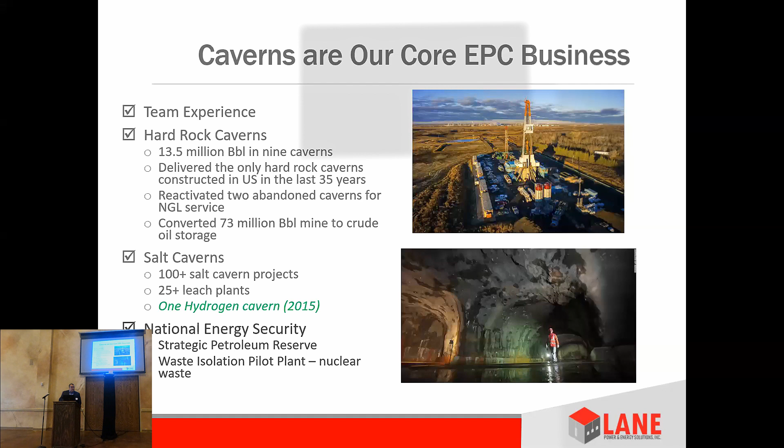On our national energy security work, my partner, who's a little bit older than I am, we call him the godfather of caverns, Tim Reichwein. He started his career out designing and building the Strategic Petroleum Reserve, and we've been doing work with them ever since. Most recently, our national security work is related to the Waste Isolation Pilot Plant out in Carlsbad, New Mexico. That's the only deep geologic nuclear waste repository in the United States. So we're doing consulting work on there for storing that, and that's in a hard rock mine down 2,000 feet into a bedded salt formation.

So, storage cavern overview: products that are stored. Primarily, caverns are used to replace spheres, above ground pressurized vessels for storage. So NGLs, ethane, propane, butane, LPGs, crude, light oil like you have in the Strategic Petroleum Reserve, petroleum products, not much here in the United States, but over in Europe, that's a big thing. They do a lot of their strategic storage for their equivalent to their Strategic Petroleum Reserves with actual product instead of crude, and they use caverns for that.

Compressed air, we've done hydrogen, as we said. We've done ammonia caverns, which we're going to talk about a little bit later, which is part of the green mix, whether used as a fuel source or as a dense carrier for hydrogen. We've done one of the only ammonia caverns in existence. And then something that's also gaining a lot of interest recently is helium as well.

Solution mine salt caverns - in the top graphic on the right-hand side, that's what a domal salt formation looks like. Those yellow caverns outlined there are about 300 feet in diameter and can be anywhere from 1,500 to 3,000 feet tall. You can fit the Empire State Building in that.

That's the size of those in the Gulf Coast. Up here in the Northeast, we've got bedded salt formations, and I'll get into that - we're a little limited on the sizes. The Gulf Coast, there's really no limit to how big you can make these. They've been a 60-plus operational year history. There's 2,000-plus caverns worldwide - we've lost count. Let's say there's several in H2 service.

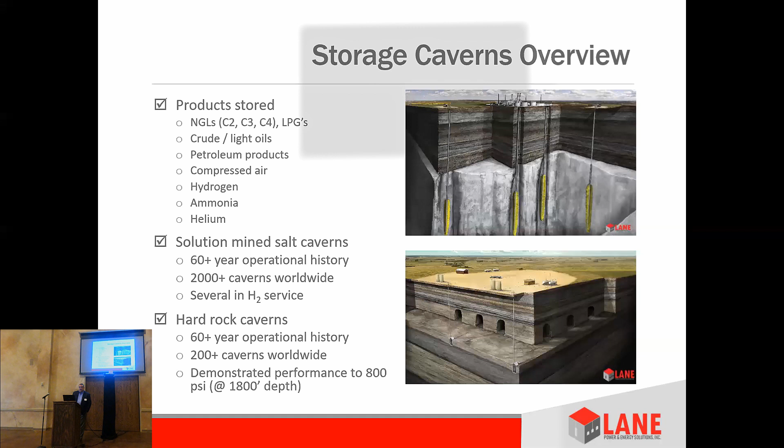So that becomes important when we start talking about hydrogen, helium, and other kinds of pressurized gases, since most of our hard rocks store liquids under pressure. So, salt cavern overview.

Two types of salt formations that we go into. On the left is a domal salt formation. The domal salt formations are just a giant finger of salt that pushes its way up. This is predominantly in the Gulf Coast - Texas, Mississippi, Louisiana, Alabama, and then obviously out into the Gulf Coast.

Kind of an interesting historical fact about salt domes: the first oil wells down in Texas - although Pennsylvania had the first oil well in the country, and I like to remind my friends from Texas about that - the first oil wells in Texas were discovered around the perimeter of the salt domes. That's why they're so well mapped, because as that finger of salt pushed up, it caused the layers to compress and the oil and gases to pool around the perimeter. So Spindletop, Mont Belvieu, those areas where the first oil was discovered in wells, all around the perimeter of the salt domes. Anyway, and those things are huge.

They can be 2-3 miles in diameter and go down 10 or 15,000 feet. So there's really no practical limitation on how big you make these things, but the biggest one that's been made is about 30 million barrels. Most of them are in the 3 to 5 million barrel range - that's kind of on average.

Now on the right side is what we have up here in the Northeast, and that's a bedded salt formation - it's just like any other geologic layer. Up here, I've got a graphic and I'll show it. We've got the Salina F4 formation that goes through the Ohio River Valley, West Virginia, Ohio, Pennsylvania. Good areas to develop down around Parkersburg, midsection around Follansbee, and in that area in the center part, and then up around the tip of the Panhandle, and I'll go through that.

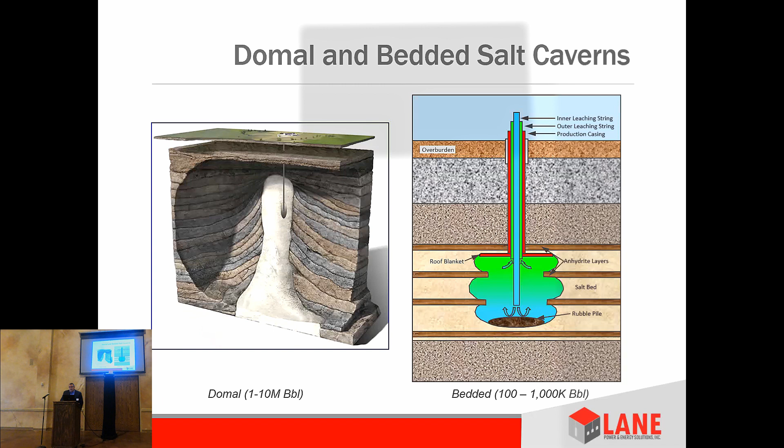So how do we make a salt cavern? Very simple - drill down into a salt formation, start injecting fresh water in, and for every 10 to 13 barrels of water you inject into a salt formation, you're going to dissolve about 1 barrel of salt. So in the first graphic you see on the left-hand side here, go down to the very bottom of it - you have a sump, and the browns that you see right there are the insolubles that come out of the salt.

You don't have many insolubles in the domal salt formation, but in bedded salt, especially through here, you've got anhydrite layers or insolubles that settle down to the bottom. So your sump design and having adequate space there is very critical. You start at the very bottom, you inject the fresh water in, dissolve, the brine goes out and gets disposed of. Then over time, you start pulling the hanging strings up, and once you get to the very top of the formation, you've created the cavern.

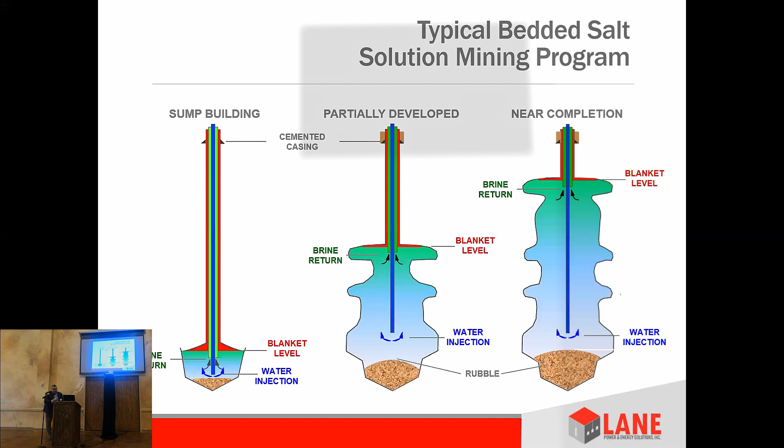So the Holy Grail, Appalachian salt caverns—nothing's been done yet, and that's because of limited brine disposal in the formations. Down on the Gulf Coast, you can get disposal wells at 1,000 to 1,500 gallons per minute. Up here, you're lucky to get a disposal well that can do 100 gallons a minute, and then it's got a limited life. So disposing of it has been very cost prohibitive up here.

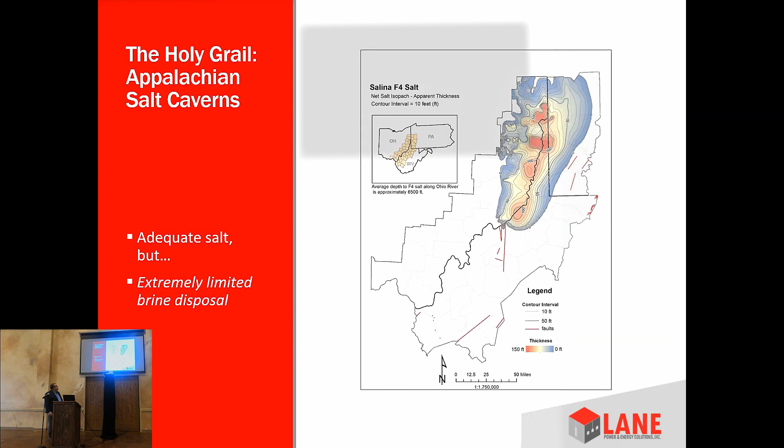But those are the areas you see, the dark red areas—those are where you have the thickest salt. Like I said, the Follansbee area in West Virginia, on either side of it, that's about the thickest salt bed we have up here, about 150 to 160 feet thick, very well defined. But like I said, the issue is brine disposal.

Yes sir, what's the challenge with the brine? Are there other compounds of concern in the mix, why is it so difficult to get rid of? Well, it's just that the geologic formations are so tight here. You just can't get the flow rate. You don't have the void space in the geology to do it.

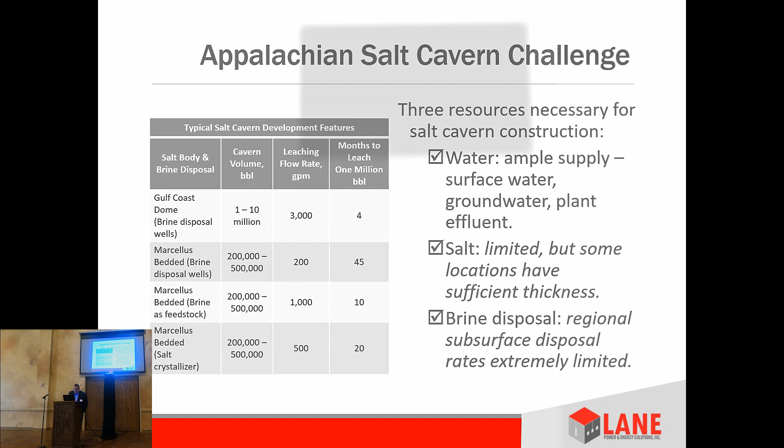So one of the things my partner and I did when we formed the company is we started working on how to solve this challenge. We were working with Shale and talking to others. So we worked with a manufacturer to take commercial off-the-shelf equipment, strip it down to everything that wasn't necessary, and we have a patent that was actually just issued in June.

So we have a brine management system for salt cavern development and operations. It's a patented closed loop system. We can develop caverns anywhere where you don't have brine disposal, or if you've got scarcity of water issues, because we recycle 93% of the water. As it goes through our closed loop process and through the crystallizer, we pull out the sodium chloride, and we only lose about 7% of the water on each pass, so we're able to recycle it and use less and less, so we're not disposing of that water. And then the salt can either be commercialized or we can landfill it.

Either way, we've got a way to develop caverns everywhere up here from West Virginia, Ohio, all the way up through Pennsylvania and New York State, if they ever choose to start allowing us to do that up there as well. They've got some nice caverns up there at Bath, but everything's been shut down from an environmental standpoint because of the brine disposal issue. So we're actually having some interesting discussions with some folks up in that area as well.

Any questions on salt caverns?

Question: I know we're talking about Appalachia, but on the Gulf Coast, would the developers be permitted to just take the brine and put it into the Gulf of Mexico? Answer: We've done that before. Yeah, you just run the pipeline out. It's just an environmental permit. So that has been done as well because it's brackish water.

Question: The term salt domes, what's the difference? What's the difference between caverns and salt domes? Answer: Well, the cavern goes into the salt dome. The salt dome is just that geologic formation, and then we leach out that cavern. And just to clear up, we do not work in depleted reservoirs. All of our caverns are purpose-built, either through the hydraulic process or leaching, or the more fun part, hard rock caverns, which are a little more exciting because you get to go down and play with explosives. I'll get into that in the next section.

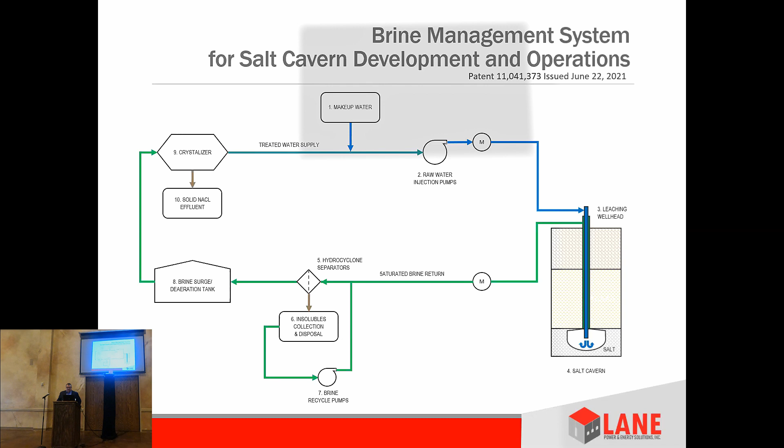Average depth of the old caverns is about 300 to 400 feet. What we do today, we can go a lot deeper. We've got better equipment, larger shafts, so we usually start about 700 feet and go down from there. What do you need? You need competent rock, adequate structural strength, minimal faulting, fracturing, and low permeability. So your shales, granite, gneiss, limestone, dolomites, sandstone, chalk - we've done caverns, and caverns have been built in all of those.

You also need favorable and stable groundwater conditions. You want an adequate hydrostatic head, recharge going into those formations because it helps with the containment of the cavern. I'll get into that on the next slide. Ample groundwater recharge, either natural or artificial, and then physically and chemically inert rock. We haven't come across a rock formation yet that had an adverse reaction to a hydrocarbon. So it's a great way to store things.

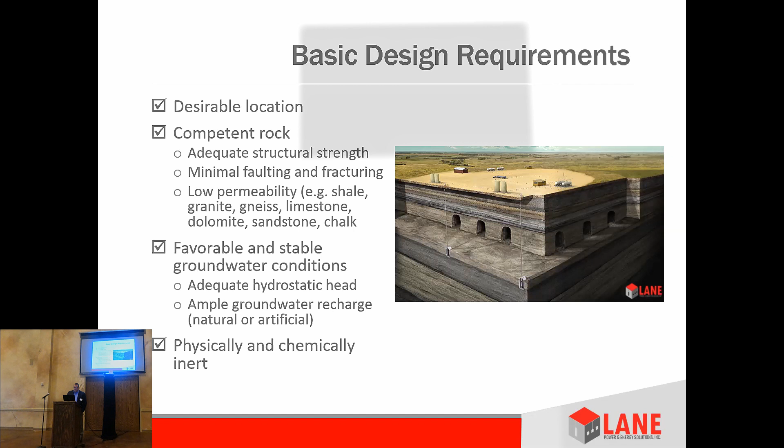So how do these things work? It's basically a hydrostatic design principle. You've got your external groundwater pressure, and the depth is critical to the cavern. Every foot of depth that you go down, you've got 0.433 pounds per square inch of containment pressure from the hydrostatic influence of the water. So the deeper you go, the higher pressures that you can store to.

In areas where we don't have adequate water recharge, we can actually put in artificial water curtains to create that. That's more prevalent - like the ones we did in China, they were actually up into a mountainside, so you didn't get that recharge, they were above sea level, so we had to create an artificial water curtain to get that containment pressure.

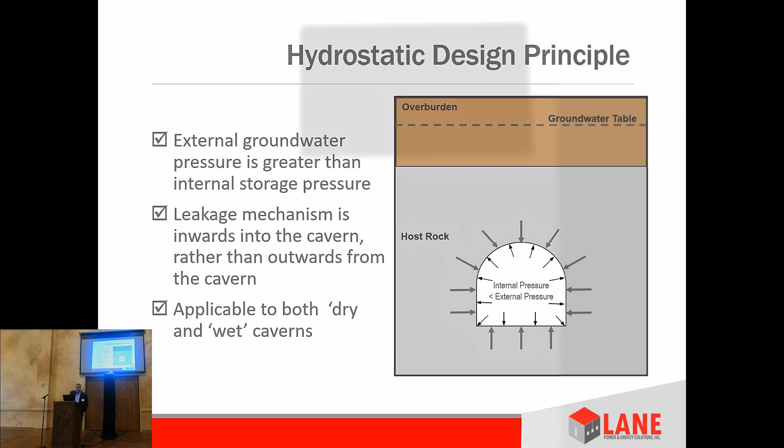So there's ways around that. But the leakage mechanism, you actually want water to come in, that's a good thing. And that means that you've got that recharge that you need. Not necessary, but it is good.

So global hard rock cavern inventory, there's 83 that have been constructed in the US, 60 are still in LPG service. The ones that are not in service primarily are for commercial reasons. The ones in Todhunter in Ohio, there was one or two that had pressure issues, and they took all those out of service, but only one or two of them really had an issue. Other than that, it's really a commercial reason why you stop using a cavern. The life expectancy, the average cavern age right now in operations is over 52, 53 years. So we've got a safe 5+ decade operational history.

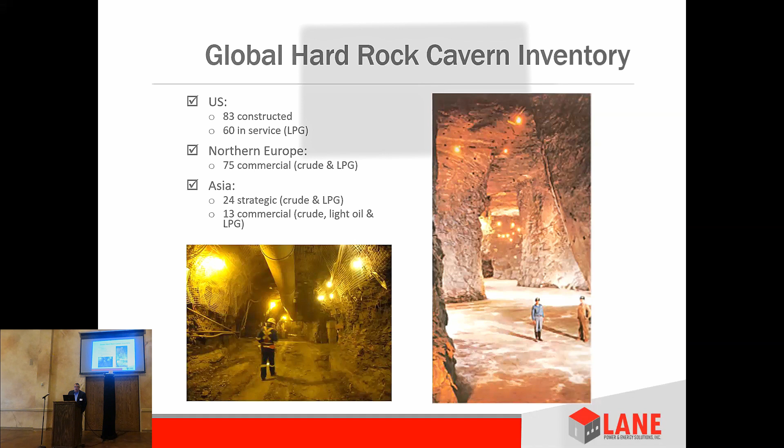Northern Europe, a lot in Norway, in the Scandinavian countries, France, Germany, and Asia, 24 strategic and 13 commercial.

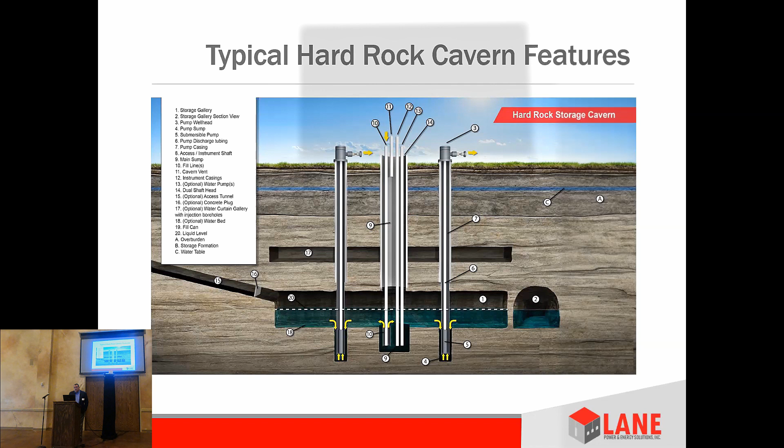What depth do you do in that? This one was down to 700 feet. All the newer ones that we've constructed as of late tend to be deeper just because it's easier to do. Back in the day, the old timers that did this back in the 50s, 60s and 70s, they brought everything in and out of a 42 or a 48-inch shaft. If we had more time, I'd show you a video from the 1960s on how these things were built, which, if you can imagine, all the equipment going out of a 42 or 48-inch shaft. So they were a different breed back then.

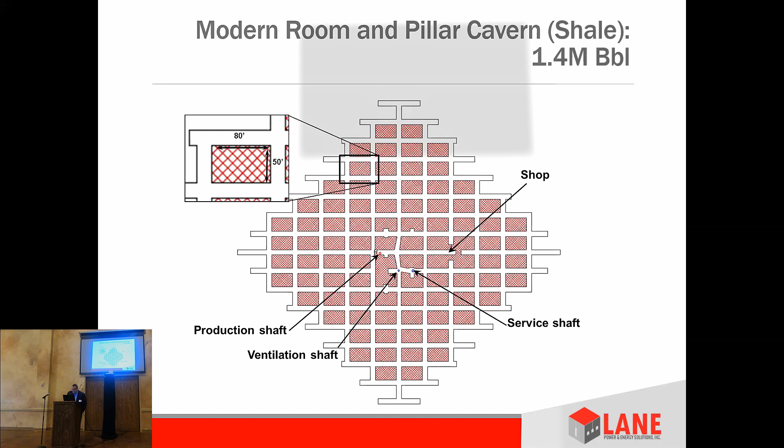And the nice part about that is you can have multiple products, which is what we're designing it for. So butane, propane, propylene, you'll have the flexibility, green ammonia. You'll have the flexibility to put anything you want in those 4 different caverns.

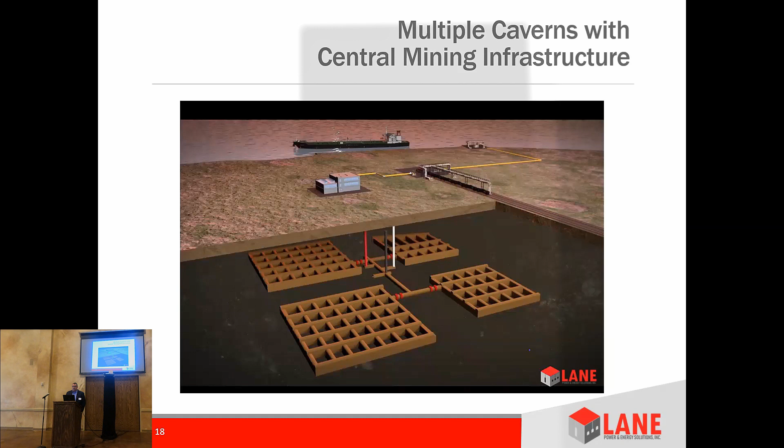And that's all in. You still have use of your surface, because remember, the expression you have on the surface is just the wellhead and the connections into your processing systems. So you've got a lot of flexibility here. As you're thinking about expansion, fractionation, things like that, you've got great shale formations at the depths you need, and we're cost effective. You can use the land as well, so you can put these anywhere.

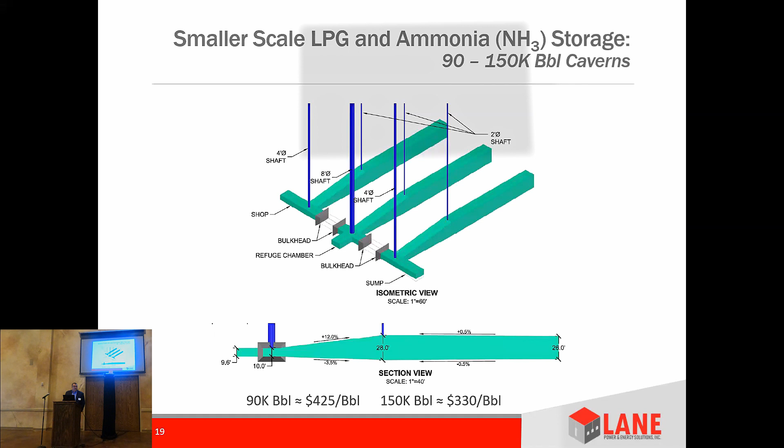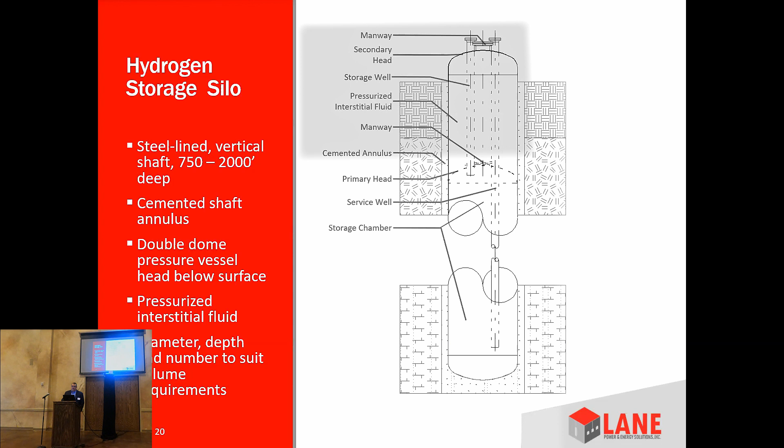So that's where, unlike having spheres on the surface and shell and tubes, you don't have to have that same kind of safety barrier. You don't have the fire protection. You don't have to worry about the blast radiuses for any of these things. Everything is contained underneath, and you just have the pipes on the surface and the wellhead.

Natural gas, renewed interest, especially after the winter we had down in Texas. A lot of interest now in strategic gas storage down in the Gulf Coast region. We've fielded several inquiries and talked to a few folks about that right now.

Hydrogen, this is the topic of the day, this is the cool stuff. It's proven, there are several large projects in development. Mitsubishi's got a really nice project out in Delta, Utah. They're also doing some work up here in CAES and other areas around the country. So they're really interesting, hydrogen as a fuel source into power generation. And with that, you're going to need hydrogen hubs. Up in North Dakota as well, there's a nice little press release about Bakken Energy putting a hydrogen hub up there.

Helium, not just for kids' birthday parties and balloons, but as an industrial gas. There's a renewed interest in this as well. And helium, I didn't realize this until I really started digging into it, but it's used as an industrial cooling gas for things like MRI machines. So every time you go in for an MRI, those magnets are super cooled with helium. Interesting little tidbit there. Green ammonia.

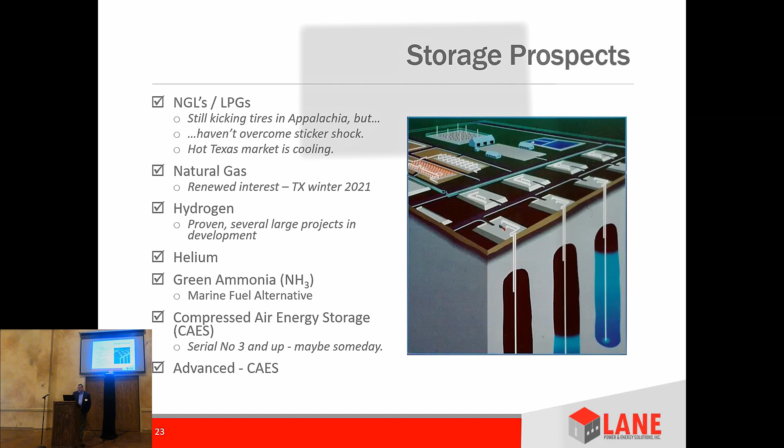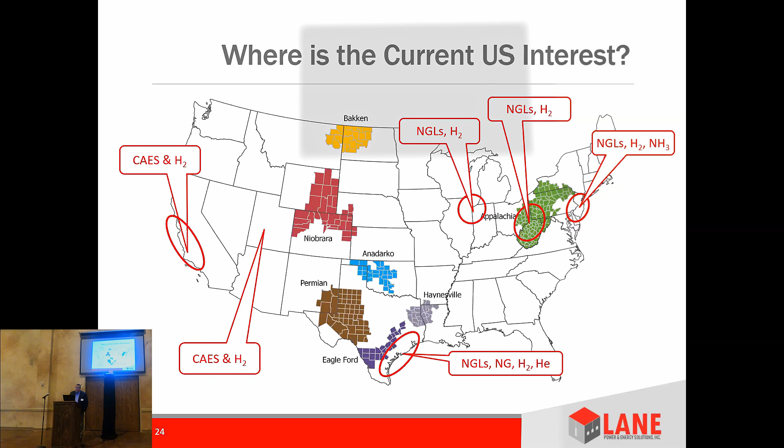Believe it or not, New Jersey, we've got NGLs, ammonia, and hydrogen being looked at and developed there. In our region, we've got NGLs and hydrogen. Mid-continent, Chicago, that area, NGLs, hydrogen. CAES, compressed air energy storage, hydrogen on the West Coast. The CAES and H2 in Utah, that's the project Mitsubishi's working on. And then down the Gulf Coast, we've got everything down there. NGLs, natural gas, helium, and hydrogen.

So, hydrogen storage caverns, why now? Green energy trends are driving the process. Europe is probably 2 or 3 years ahead of us right now. They've just gotten out ahead of that. Their energy mix, their cost profile, a lot different than here in the United States. But they're making great strides in pipeline conversions and storage and uses, whether it be power generation or the transport sector. They're making great progress there. There's several new developments throughout Europe.

And why not for hydrogen storage caverns? Very large volumes, very cost effective. There are 6 caverns in the world. We have 3 in the UK, and they've been in operation since the late 60s, early 70s in Teesside, England. And then there are 3 caverns here in the US, all down in the Gulf Coast. Like I said, we did the last one for Air Liquide back in 2015.

Design and operation, very similar to natural gas caverns. They're a direct analog, it's just a compressed gas. The only difference is how you treat the casings. You have to have special weld procedures because of the hydrogen molecule. Otherwise, we've been using hydrogen for industrial applications for the past 100 years. There is no great mystery about this. It just has a resurgence now, to reduce emissions.

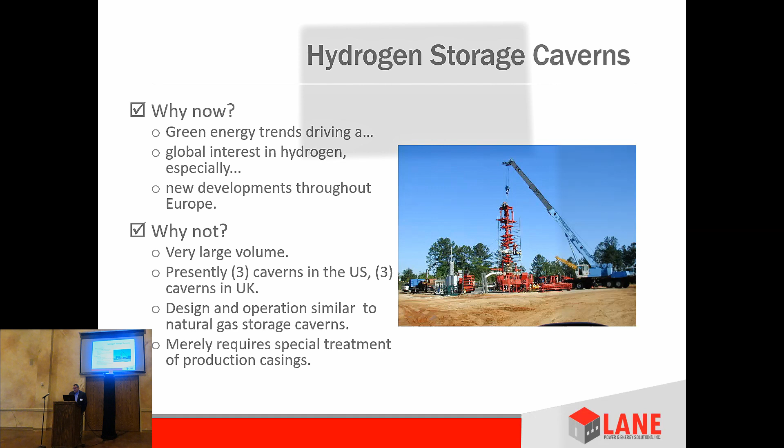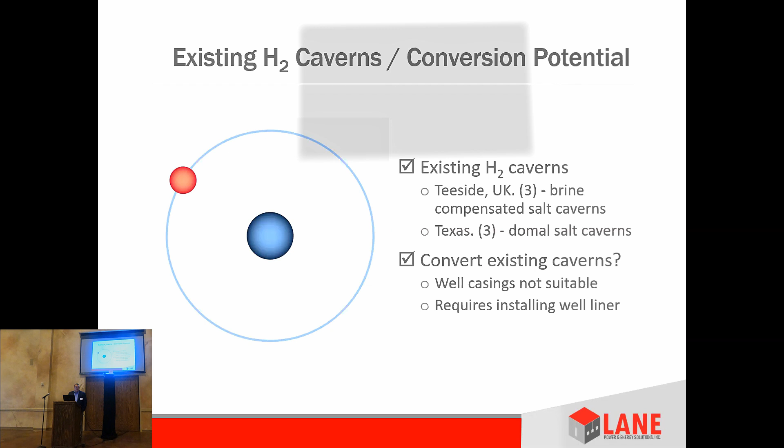We get questions: can you convert existing caverns into hydrogen service? No. You can, but it's not the best application. The well casings are not designed for it. So you can either put a liner and a packer in the existing casing, but you're going to throttle down your flow rates through that, or you can plug and abandon, cap that existing well and just do a re-entry well that's purposely designed for hydrogen. So can we take an old one? Yes, we can convert it, but you do have some limitations when we do that. The best thing to do would be either a new cavern or a new entry well into the cavern.

So here's some other green energy trends where hydrogen is going to play a role as well. Compressed air energy storage - is everybody familiar with this? Have they heard about it? It's analogous to pump hydro storage, but instead of putting water up into a dam, you're compressing air down into a cavern during off-peak hours. And then during peak hours, you're releasing that air. It's going through the turbine, and then you increase the electrical output of that turbine, which uses natural gas alone, by about 30 or 40%.

But it's costly, caverns are expensive, and as we all know, natural gas - we're the leader here - it's very cheap, and that's the reason why nothing's been done in 30 years on that. But I do think when we start talking about hydrogen and using hydrogen along with the mix in these turbines, you are going to start to see compressed air energy storage projects probably being mixed in with a hydrogen storage project as well, to do joint hydrogen turbines. So we're at a pretty cool spot here. That's why I put it in there, something to look at as far as the trend.

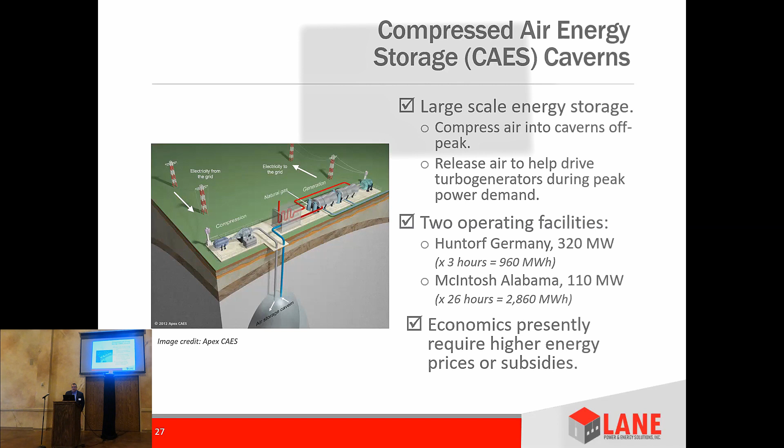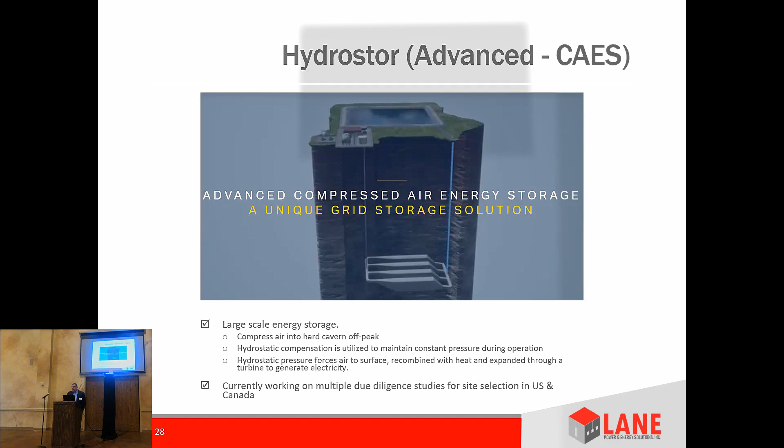This one's interesting as well, and once again, I think hydrogen's going to play a part with this. There's a company called Hydrostor that's doing advanced compressed air energy storage. What's interesting about this is typical CAES projects use salt domes, while the advanced CAES is going to use hard rock caverns. And the difference between this and the others is they've got a freshwater pond on the surface. So as you charge up the cavern and take it up to about 800 PSI, you're going to displace the water up into the pond. Then when you're ready to release that air into the turbine, that water comes down, and what's interesting is you don't get a decrease in pressure - you get a constant pressure and mass flow rate out of that cavern going into the turbine. So that's something to keep an eye on as well. You're going to be hearing more about this in the future, and once again, you're going to couple that with a hydrogen-powered turbine, and this is going to be in the mix for renewable energy.

So cavern cost and development.

For a salt cavern, it's a month or two for geologic pre-feasibility, another 3 to 4 months for core drilling and salt core testing, another 3 to 4 for front-end engineering design, and permitting, 6 to 12 depending on the jurisdiction. So we're looking at 43 to 70 months for development of a 1 million barrel cavern, depending on the jurisdiction and the flow rates with the crystallizer and everything else.

CapEx, what's it cost? Hard rock, and the deeper you go, the more expensive you get. Hard rock caverns down 2,000 feet, max pressure 800 PSI, you're looking at $133 a barrel for 1 million barrels. Here's the important thing to remember when developing a hard rock cavern: your first barrel of storage is your most expensive. Your first barrel is going to cost about $30 to $40 million, and then it's just the incremental mining cost thereafter. So the larger you make it, the cheaper the per-barrel cost.

Gulf Coast salt is the cheapest storage you've got. Average depth down there is 4,000 feet for the cavern; for 1 million barrels, you're looking at $80 million start to finish. It's important to note the incremental cost thereafter, because once you've made the investment in the infrastructure, the leaching facilities, the brine disposal wells, the water wells, your incremental cost to develop the next 1 million barrels is only about $2 a barrel. Once you make that investment, that's why the Gulf Coast is so prevalent, because it's just so cheap to work down there.

Up here in Appalachian salt, depth is 5,000 feet down, max pressure 3,400 PSI. I put working mass in there for hydrogen, which is important when you're looking at turbine feedstock. But it's about $82 million for your first million barrels. For 2 million barrels, incrementing once again, the cost goes down because you've already made that investment.

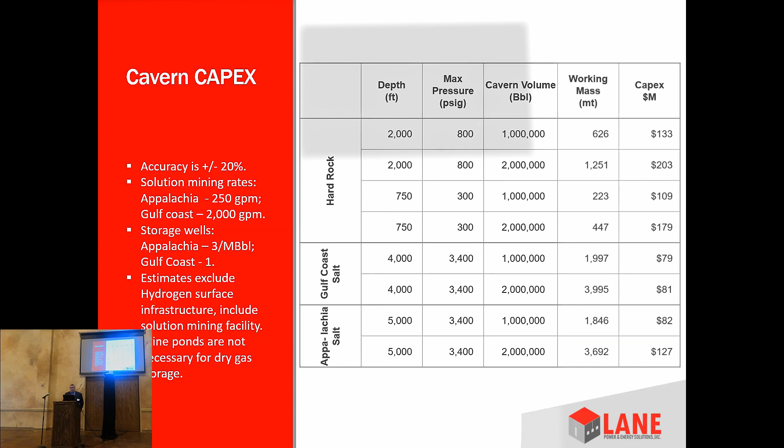Any questions on cost? If you're interested in developing a cavern, it's about $25,000 to $50,000 for the desktop geologic study. After that, pre-feasibility is getting a hole in the ground. Hard rock caverns are about $750,000 per hole. Salt caverns, because of the depth and the size of the core, need a 4-inch core, so you're looking at about $2 to $4 million depending on depth—closer to $4 million here because we have to go down very deep.

Definitive feasibility for a hard rock cavern requires additional cores—you need to core out the entire geology around the perimeter so you can accurately map it, so you need more than one core. In a salt cavern, you only need that one core; you take it, test it, and can develop your leaching program no matter what, so you don't have to do anything further.

And then for your FEL3, your feed, once we do all that design, you're looking at spending about $750,000 to $1.5 million for us to put together a full design for you to get to construction and go forward.

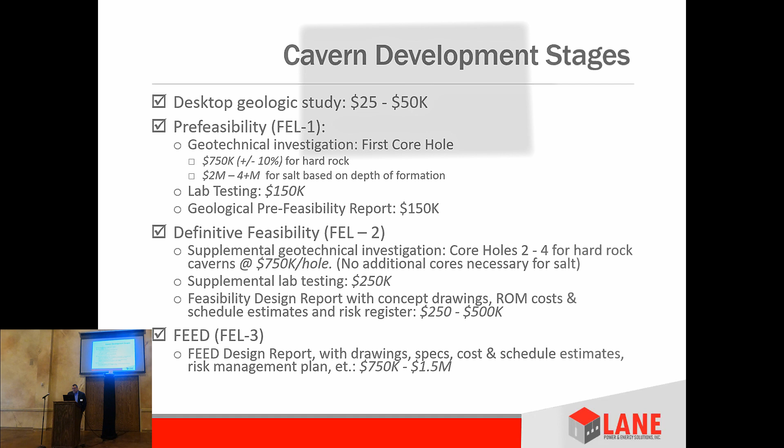So key takeaways that I want to talk about. Hydrogen is forecast to become a $130 to $170 billion U.S. industry by 2050. So this is something we need to pay attention to, and it's going to exist with our industry hand in hand. Natural gas and hydrogen are going to coexist for the foreseeable future.

Biden's infrastructure plan allocated $73 billion for clean energy transition, and in that there's $10 billion for hydrogen, pipeline, research, and storage, plus several other interesting things. I thought one of the most interesting, if you ever get a chance to read it, it's good if you're trying to fall asleep. Pick up the infrastructure plan and start reading through there, you'll be asleep in no time.

But in there, there's actually a shot at electric vehicles, where now they've got to take full account of the carbon used in the entire manufacturing process, mining process, and give the true carbon footprint of the electric vehicle.

Why I mention that, I think it's very important because hydrogen is a fuel source into the internal combustion engine. They talk a lot about hydrogen in fuel cells generating electricity for cars, but they're not talking about using hydrogen directly into the combustion engine, which has been able to be done for 100 years. So I think whoever put that in there, the intent was to start focusing on using hydrogen as a refuel, as a replacement for gasoline or supplement to gasoline in certain areas, like fleet vehicles. So I think there's going to be some movement toward using hydrogen as the direct fuel source into internal combustion engines. I thought that was pretty interesting.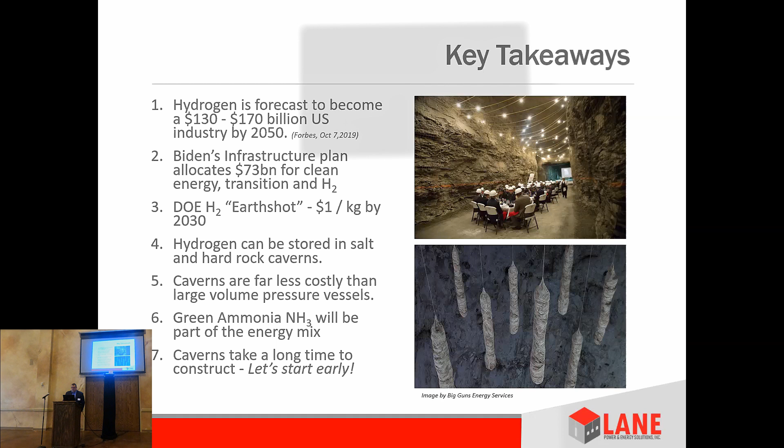Any questions? All right.

Has there been any hydrogen storage, I realize you guys do caverns, but has there been any hydrogen storage either successful or attempted in converted reservoirs? You know, they've talked about it, I think they've studied it, but the problem is since hydrogen is a purity product, the heel that you have to leave behind would be very costly. So I don't think with something like hydrogen and helium you want that into a cavern, you want defined void space area so you can get it in and out with limited heel. But putting it down into a reservoir, I don't know what kind of percentage you get back out of that, but it is being studied.

Yeah, I was curious because it would seem to me to not be the best of ideas. No. Well, it's a smaller molecule, and it's going to be able to find its way further than the natural gas that was in the reservoir to begin with, so it's going to be harder to get out once you put it in. Exactly, and I think that's why, they've studied it, they've looked at it, but I don't think anything will happen with that.

And then I have a second one, so green ammonia. Yes, you want to explain? I think I know what you mean by green ammonia, you want to explain? It's just made through renewable energy sources. Right, so that's it, it's not made by the natural gas that we know.